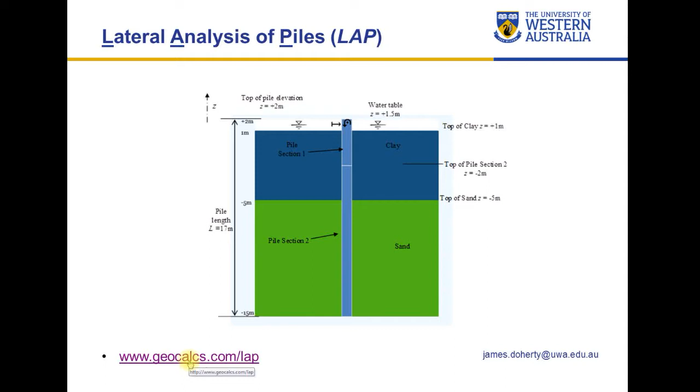The application can be accessed at www.geocalcs.com/lap, so we'll go straight there. If you haven't already done so, you can register simply by clicking on the Register tab and filling in those forms. Once you've done that, you go back and enter your email address and your password to access the program.

To create a new project in LAP, you select the Create New Project option, and then you enter a project name. In this case, we'll just enter Example Project as the project name and Run 1 as the Run ID, and then hit the Create button. As soon as you hit the Create button, the Pile menu is active.

So to define the pile, you define the elevation of the top of the pile and you define the total length. So the elevation of the top of the pile in this model is 2 meters and the total pile length is 17 meters. Once you do that, you get this clickable object that when you select, you get some menu items on the left that allow you to enter the properties. The properties for this pile we'll enter as 1.3 for the diameter and the flexural rigidity, so the EI value of 50,000 kilonewton meters squared.

In this particular model, we want to create two pile sections. So we create the second section by hitting the plus button, and then we enter the elevation of the top of the second section. So that then splits our clickable object into two parts, the top representing section 1 and the bottom representing section 2. And then we enter the properties for the second section of the pile. We enter a flexural rigidity of 25,000 and a plastic moment capacity of 1,000 kilonewton meters, fairly arbitrary values.

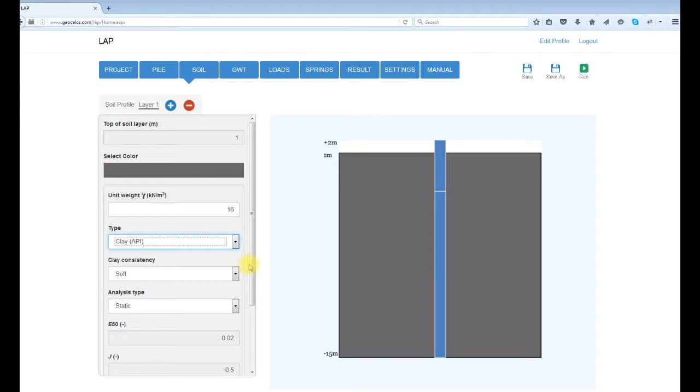From the type we select clay API from our list of available PY models, and we're going to choose the consistency as soft. From that list there, we'll select static as the analysis type, and then we'll enter the undrained shear strength at the top and then the change in undrained shear strength with depth.

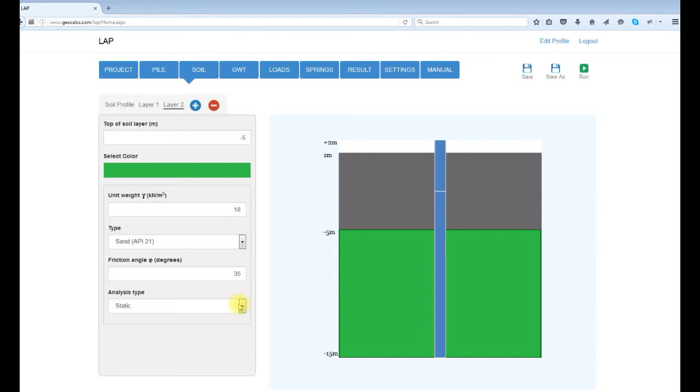Again, in this model we have two soil layers, so hit the plus button and then enter the elevation of the second soil layer as -5 meters. That splits our soil up into two clickable objects. We can change the color of the second object just to give us a bit of contrast. And then we start entering properties for that second section, 18 kilonewtons per meter cubed for the unit weight. I'm going to select Sand API and give it 35 degrees as friction angle.

Then we can select the groundwater table and enter that as 1.5. Then we get the symbol representing the groundwater in our clickable objects. Next we define the loads, and we have the option of including a surcharge, which has the effect of increasing the vertical stress in the soil by the amount you enter. In this particular model, we're not going to include a surcharge, so we just set that value to 0.

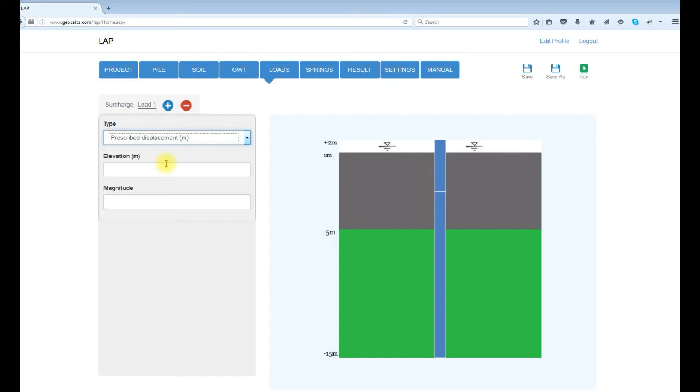To define the first load on the pile, we select load 1, and then from the pull down menu, we select prescribed displacement, and then we enter the elevation where we want to prescribe that displacement, and that is 2 meters at the top of the pile, and the value we're going to prescribe is 1 meter.

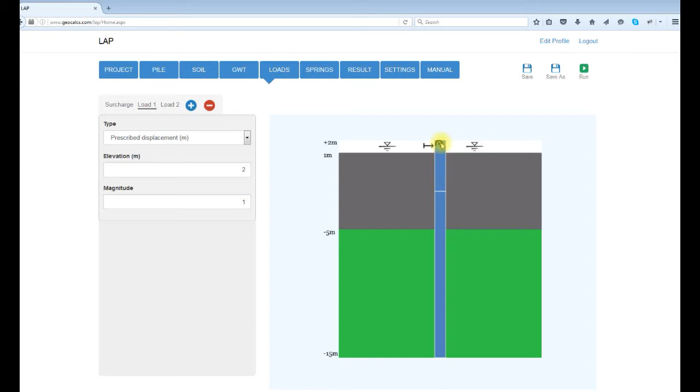To create a second load, we hit the plus button, and then we select from the pull down menu a prescribed rotation, and we want to fix the pile head at the top, so enter the elevation at the top of the pile and then enter 0 as the prescribed rotation. After doing that, we end up with these two clickable objects in our model representing our prescribed displacement and rotation.

LAP also gives you the option of entering elastic reaction springs. These are meant to represent ties or struts. They're not used to represent the soil. In this particular model, we don't have any, so we don't need to include them. We've now defined everything, so we can run the model by hitting the green button in the upper right-hand corner. And when we do that, we get a series of summary plots.

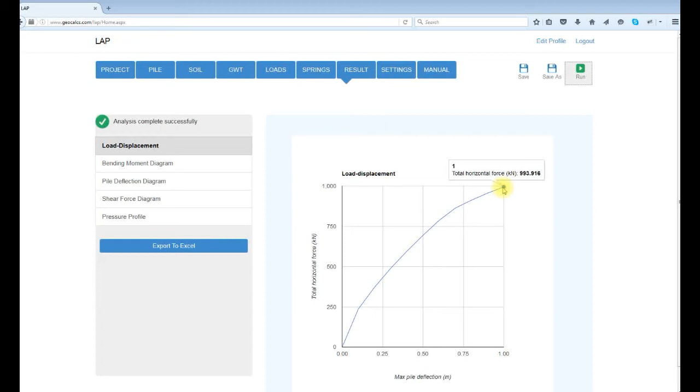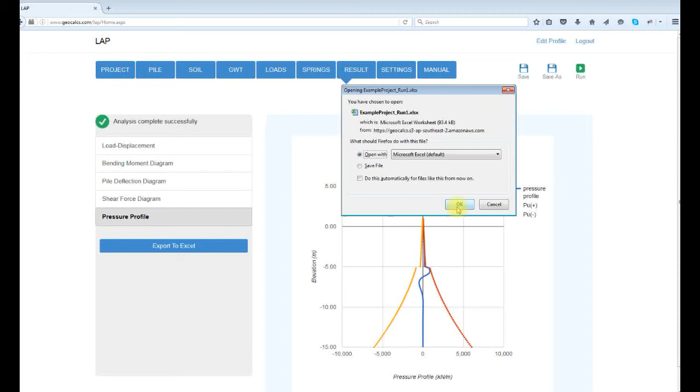First is the load displacement plot, which shows we get a displacement of 1 meter with a force of about 1,000 or so kilonewtons. We get a bending moment diagram, a pile deflection diagram, a shear force diagram, and also a pressure profile diagram. We can download a full set of results to Excel, and when you do that, you'll see an Excel sheet with a series of tabs.

The first tab basically summarizes the model, including the project name, the run ID, your solution settings, etc. We then have a summary results tab, which just gives you some information about the time steps used to solve the problem, the number of iterations in each time step, etc.

Next, we have a load deformation tab, and this tab provides the displacement and force or the rotation and moment for each of the load cases that we specified. So our first load case was a prescribed displacement of 1 meter, and there are the reaction forces that we needed to generate that displacement. Similarly, we have zero rotation and the moments required to generate that zero rotation.

Then we have results that summarize our pile. So these are our elevation coordinates, our diameter, the pile EI. Note we have two different pile sections, and you can see that the properties change at an elevation of -2 meters. Along with that, we have bending moments for each of the time steps, shear forces for each of the time steps, displacements, and also rotations within the pile.

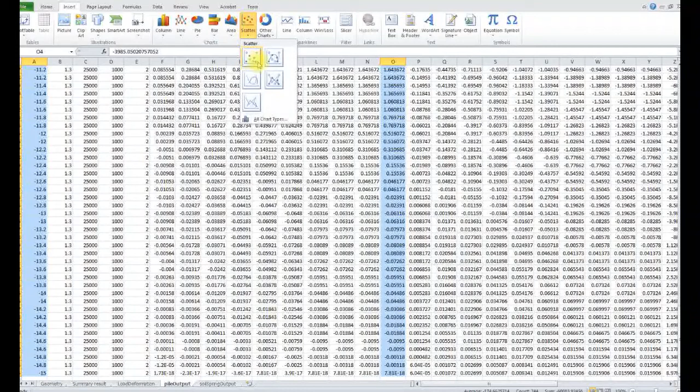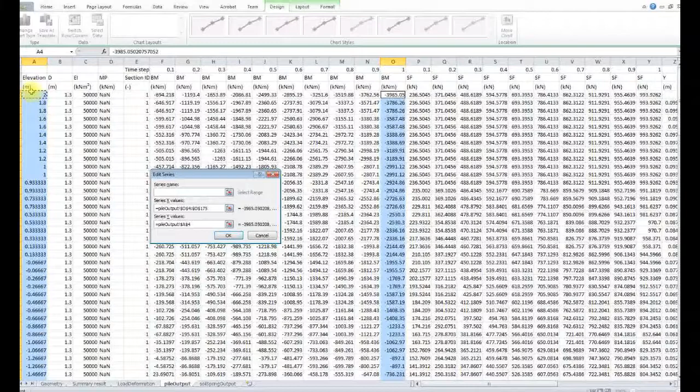And of course, you can quite simply just plot the elevation, for example, against pile bending moment at the end of the analysis. In Excel, it's fairly straightforward. So just altering the axes, so we plot elevation on the vertical axis and bending moment on the horizontal axis. That's the bending moment diagram that we get.

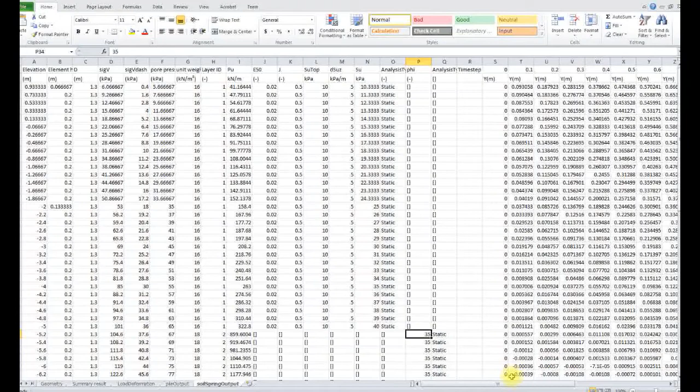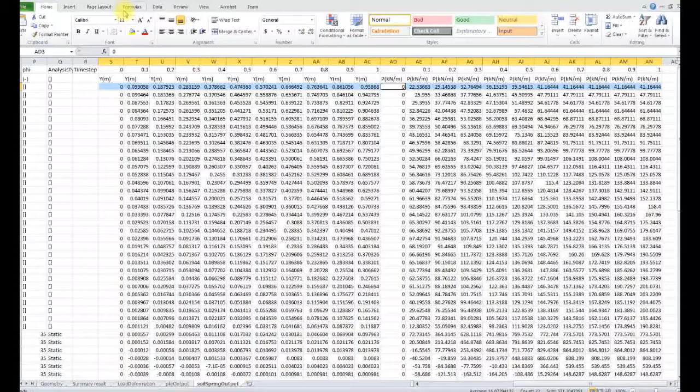Then we move over to soil springs, and again you can see the elevation of each soil spring and the input properties used to generate the PY curve for that particular spring, and we have a clay model overlying a sand model, so the parameters are different. Then at each spring, we output the Y value versus the P value, so you can actually plot the PY curve for each of your springs.

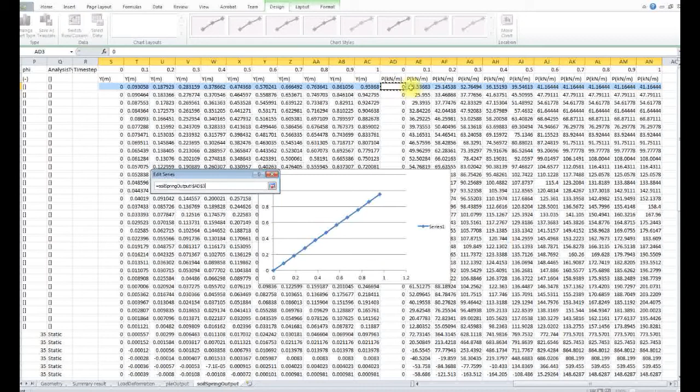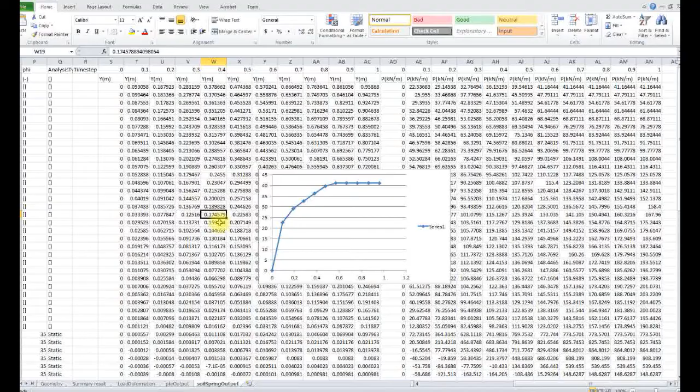Excel doesn't naturally plot these values in a very convenient way, so once you plot them, you just have to reselect the vertical and horizontal axes, and that's your PY curve for the first spring, with your P value in kilonewtons per meter on the vertical axis and Y in meters on the horizontal axis.

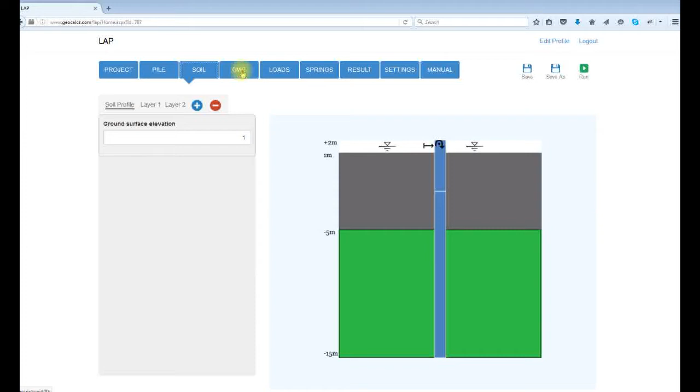Whenever you run a project, it's automatically saved to the cloud. So if you go back to projects and load project, you'll see that this job now exists in the jobs list. You have a few options. You can share it, or you can load it back in at another time and modify it and rerun it whenever you like. For more information, you can click on the manual option to see the user manual for LAP.

The example that I've been through in this video is more or less based on the first example in the user manual.